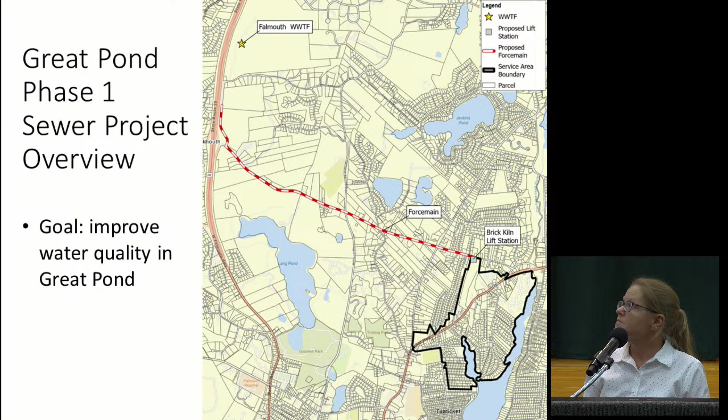The schedule for the project: we'll be submitting the loan application to the state. We are on the list for a 0% interest loan from the state for this project, but we have to submit our final application this month, August, and we're going to be bidding the construction contracts this fall. There will be 2 construction contracts. Construction will start near the end of this year and is projected to take 2 years to complete, so it'll be completed by the end of 2027. Sewers will be available for connection at the end of 2027 or the start of 2028. Property owners will have 1 year after notification to connect to the sewer.

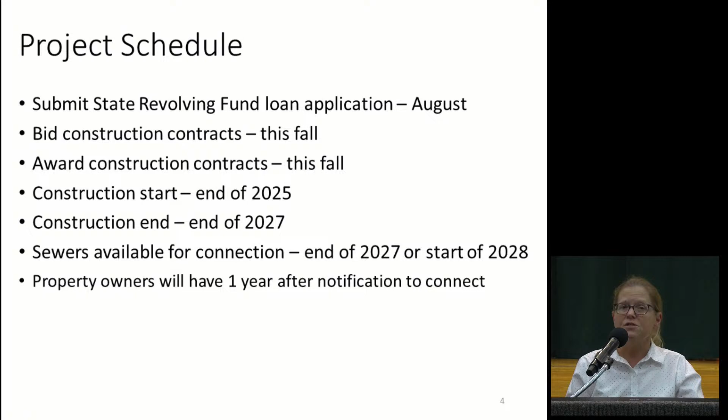You'll get a notification when the project is complete, either end of 2027 or beginning of 2028, and it'll tell you that you have a year to connect to the sewer. The sewer service area is approximately 600 properties on the northeast end of Maravista and on the Teaticket Path Peninsula. It's mostly single-family homes or condominiums, with a few commercial and multi-family properties in this area.

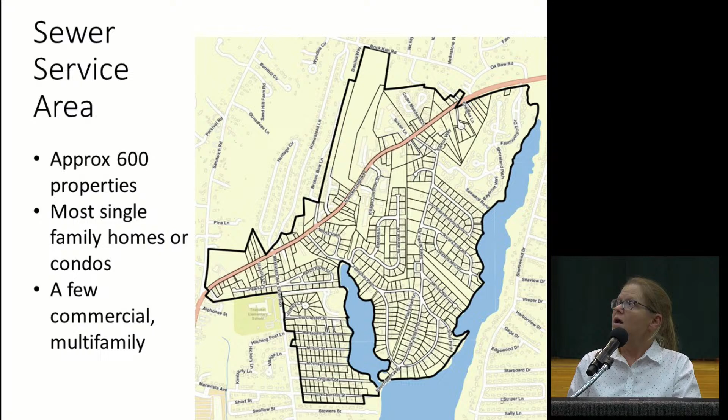For the sewer connection types, there will be a pipe in the street in every one of these roads, and some of those pipes will be gravity pipes. In this figure, the green areas, which are only on Maravista in this project, will be served by gravity sewers, so those properties will connect to sewer by gravity.

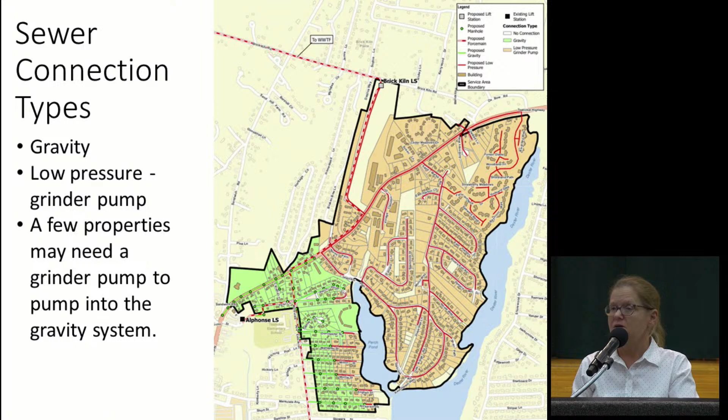The properties shaded tan or brown, which is all of Teaticket Path Peninsula, as well as the lower portions at the end of the roads that dip down a little lower, will be served by grinder pumps. There are a few properties that may have a gravity pipe in front of the home, but because the property drops off and the home is lower, they may need to pump into the gravity system. We'll figure that out as we get closer, but this is a pretty good idea of what the gravity and low pressure distribution will be in the sewer area.

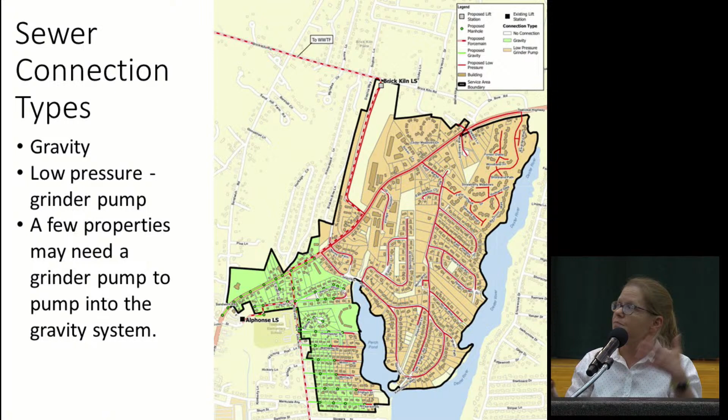It's a 2-year construction time frame. The town's contractor will put sewer mains, which are the larger pipes, in the roads and the manholes, and then lateral pipes from that main in the road out to the property line for each property in the sewer area. A lateral is just the pipe from the sewer main in the road to each property owner's property line.

There will be several passes of construction on each road because the contractor will come in and put in the sewer main, then come back with another crew who puts in the laterals from that main to the property line, then come back and do temporary paving, and then come back and do the final permanent road paving. So that's 4 times construction will go by each property, but it's a linear project, so they keep moving in each time they come by.

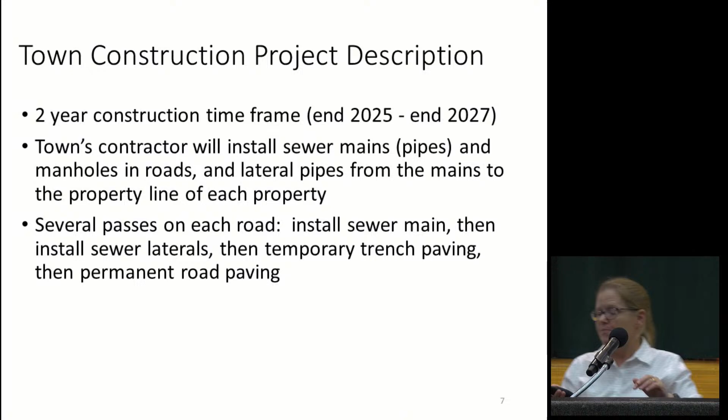As part of this project, we have in the project bid documents full width mill and overlay paving for all the roads that are currently paved in the sewer service area. Unpaved roads will be restored as they currently are surfaced. Most of the roads in this sewer service area are private roads. The town is not taking over ownership of roads as part of this project, and we're not taking over maintenance of the roads. We are paving them because we are disrupting them, but they're not becoming town roads through this process. There is also no stormwater improvement associated with this project - I'm sorry to say that - because stormwater improvement on private roads would increase the cost of the project dramatically, and it's not in the project.

There will be multiple crews working simultaneously in the sewer area, and we won't know ahead of time exactly how the contractor chooses to move through the area. But we will provide information updates on a very regular basis about where the contractor is expected to be in the coming weeks. There are preliminary traffic detours included in the contract, and the contractor will be allowed to work year-round. This is a summer community, and it's not ideal to have construction in the streets in the summer. However, it gets the project done a lot faster, saves money, and moves through each area consistently. So there is no summer exclusion in the project except on Route 28.

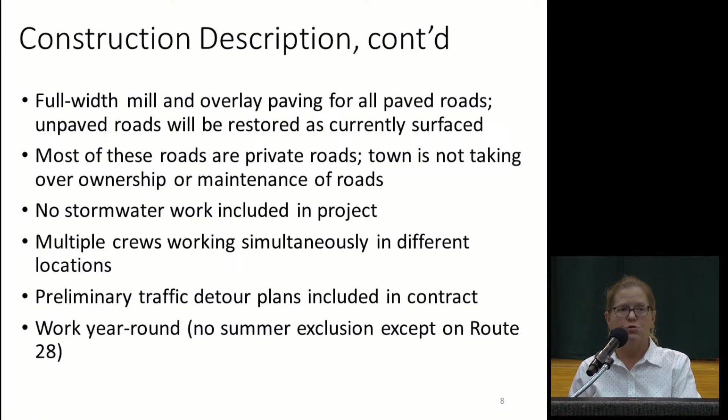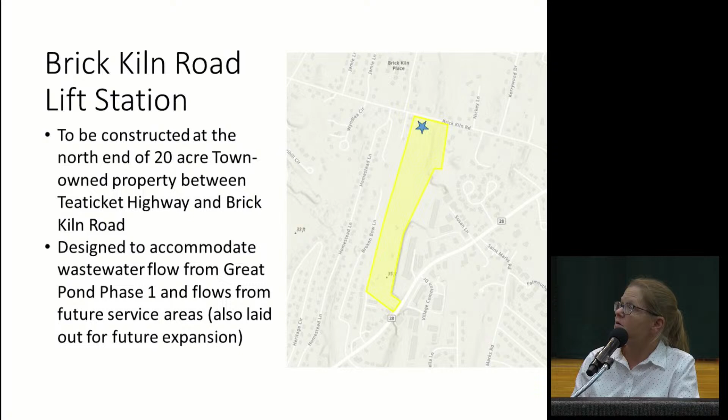The Brick Kiln Road lift station will be constructed at the north end of the 20-acre town-owned parcel between Teaticket Highway and Brick Kiln Road. It's designed to accommodate wastewater flow from this sewer area, as well as from planned sewer areas further to the east and in Falmouth, and it's laid out to allow future expansion beyond that if needed. Construction of the lift station will also take about 2 years, and the Brick Kiln Road site will likely be used as a staging area for the contractors, as it was used previously in a water project.

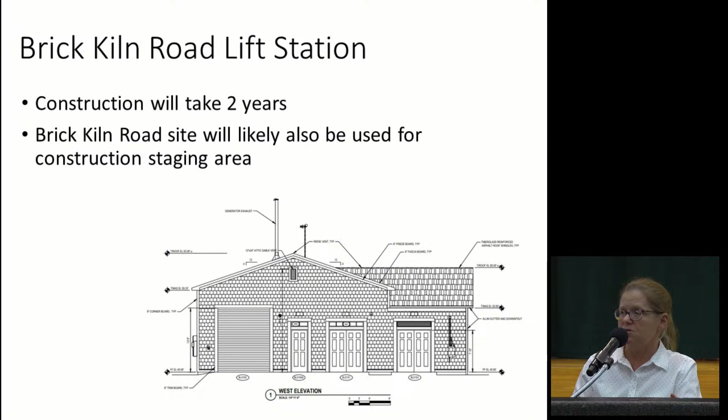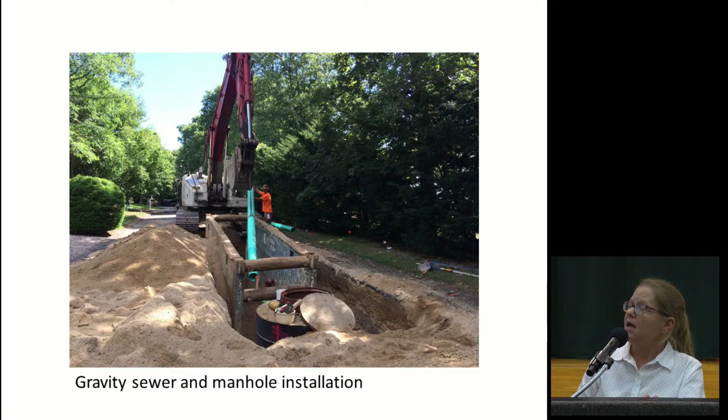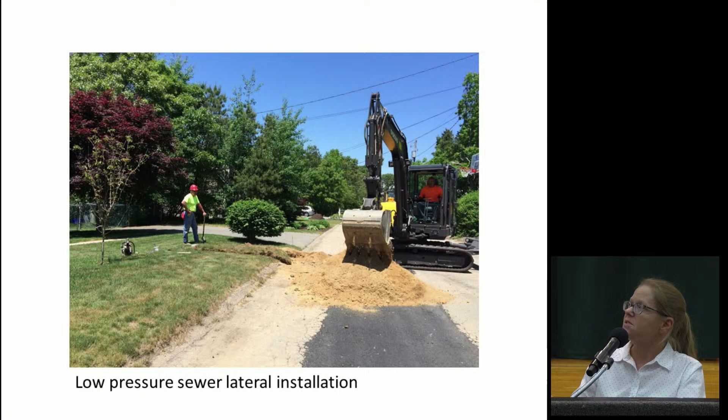And this is installation of a low-pressure sewer lateral. You can see there's a pipe already in the street, and because this is low pressure, that's a relatively small trench, and this crew is installing a lateral to the property line.

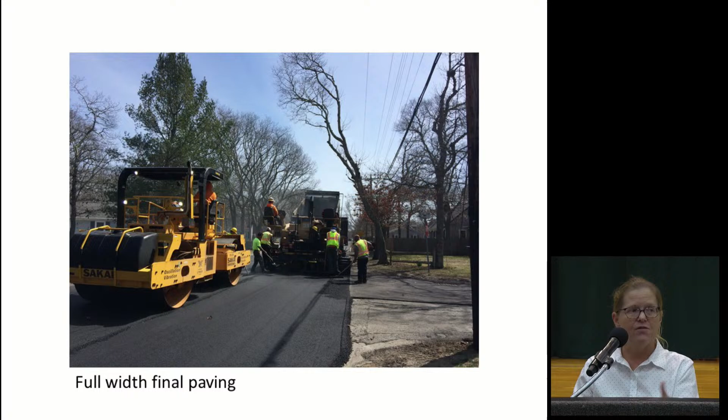So whatever the existing width of the pavement is, we're repaving that. We're replacing the existing footprint of the paving.

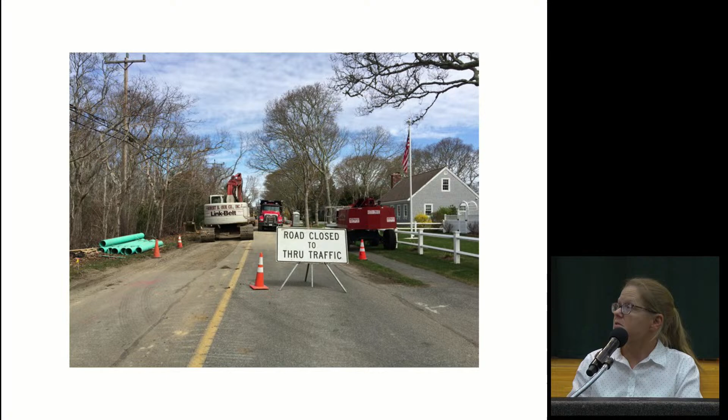Again, there will be some detours and some traffic impacts. One of the early things that will happen in the project is that you'll have the opportunity to tell the contractor and the town where you would like the sewer lateral to be installed.

The sewer lateral placement would depend on where the existing septic line leaves the house and some other factors I don't need to get into right now. So you could consider discussing this if you have a plumber, installer, or engineer you work with. Or if this is something you already know, you can start looking into this.

We do in the design have a lateral location planned for each property at this point, based on the available information we have. The engineer looked at the septic records, and where we have septic records, we are locating the laterals based on where the building is on the property and where the septic system is shown.

But what will happen at the beginning of the project is the contractor will put out a stake, a green stake, and then we'll provide you a sign. So you will be able to tell us, no, we don't want it there, we want it here. And we can change that before the lateral's installed.

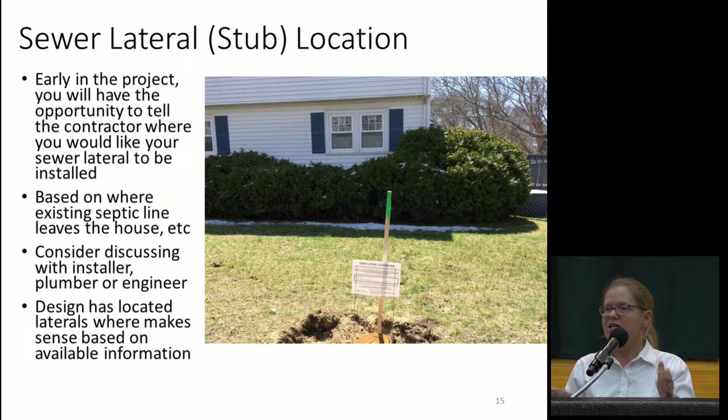The sewer connection process: sewer connections will not begin until the end of 2027 or the beginning of 2028. So it's more than 2 years from now.

I don't want people to leave this meeting in a panic that they have to connect, that the project's beginning and you have to connect to the sewer. You can't connect to the sewer for more than 2 years. So there is time to figure things out and plan ahead for it.

The first step will be to contact installers, plumbers, or engineers, review sewer connection options and layout, and obtain quotes for the work. Again, it doesn't need to happen now, but when we send out mailings ahead of time telling you to prepare, then you would start this process.

For the Little Pond project, we required that connections be overseen by a plumber licensed in Massachusetts. I am considering certifying drain layers instead. The town doesn't have that right now, but if we were to do that, it would require a town bylaw change. So to be honest, I'm not certain right now whether a plumber will be required to be involved for all of the work.

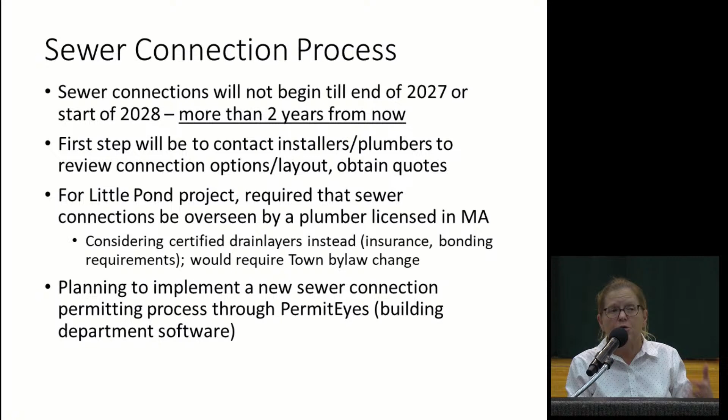We are also planning to implement a new sewer connection process. For the Little Pond project, there was this whole separate sewer connection process that is now obsolete. The town building department has a building permit system called PermitEyes, and we will be setting up a module in that for sewer connections, so contractors will apply through the building department's permit system to connect to the sewer.

The property owner, and the property owner's contractor, will also be responsible for abandoning the septic system. Abandoning your septic system is the jurisdiction of the Board of Health, but what they have required in the past is that you pump the sludge out of your septic system, and then your contractor has to punch a hole in the bottom of it and then backfill it with sand.

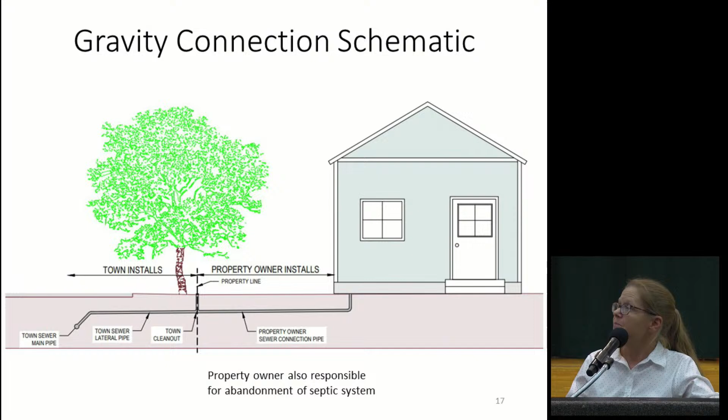They can remove it if you want, but that's likely more expensive. So what most people do is punch a hole in it and fill it with sand or clean fill. This is a schematic of a low pressure or grinder pump connection schematic.

Again, the town will install the pipe in the road, which is a smaller diameter pipe for low pressure, and will install a lateral to the property line. And at the property line, it'll look a little different. It sort of looks like a water valve, which you all have on your property. So we'll install a valve at the property line.

And then the property owner's contractor is going to be responsible for installing the connection between the home or the business, in the case of a business, and that lateral at the property line. In the case of a grinder pump connection, there is a grinder pump involved, and I'll be talking more about that, and a control panel, electrical for that.

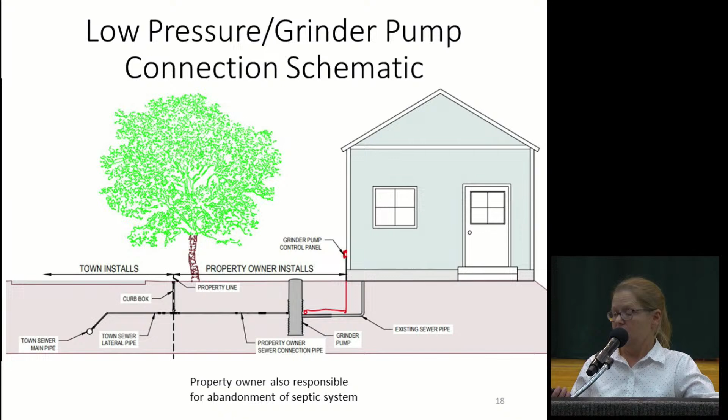This is a little bit of a cartoon of a grinder pump connection. Again, here's the pipe in the street, and here's the sewer lateral to the property line, and the valve at the property line. The property owner's contractor will take gravity pipe from the house into the pump, and wire up the pump to a control panel, and then they'll install this pump, and the pump will have a smaller diameter pipe which will pump into the town's sewer system.

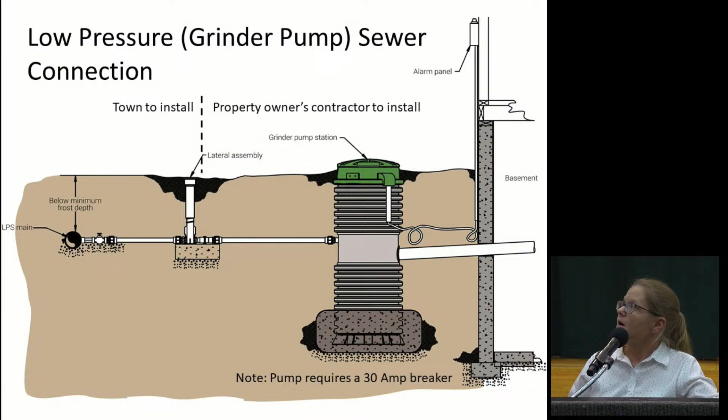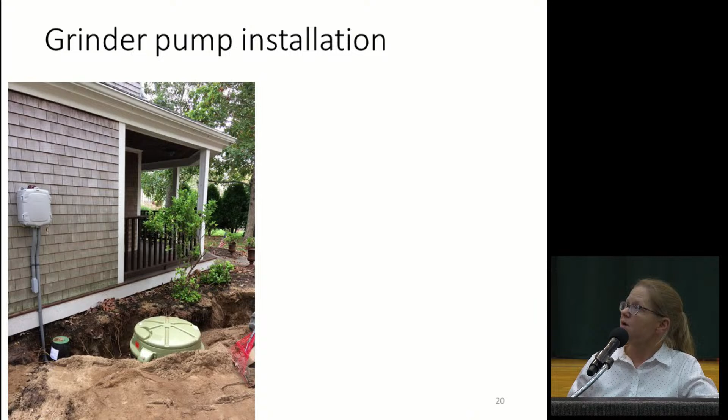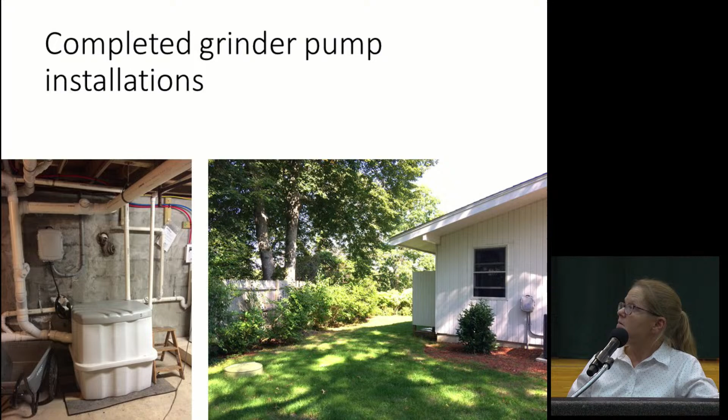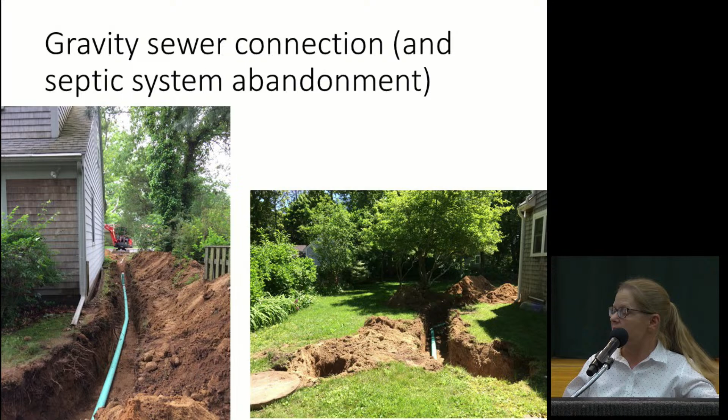So I wanted to talk a bit about grinder pump policy. Grinder pump policy has not yet been set for this project, so I can't tell you for certain what the grinder pump policy will be. I can tell you what the grinder pump policy was for the last project.

The last project, the Little Pond project, we installed 681 grinder pumps. The select board voted to provide those pumps for single-family residential properties, not for commercial and multifamily properties.

The town also agreed to provide maintenance of those pumps, reserving the right to charge the property owner if the pump was misused, if people are throwing things down the drain that really don't belong there and it's causing a problem. We reserve the right to charge property owners, but overall, the town is performing maintenance on those pumps.

The town also agreed to provide emergency pump out service as feasible during power outages greater than 24 hours. Many people choose to put in a generator for their property, but if they don't have that, this is something the town did for the last project. The town also voted to provide pump replacement at the end of the pump's useful life.

Finally, the town also provided a subsidy, which was a flat amount. It didn't reflect the actual cost on any one property. It was a flat subsidy to partially compensate property owners with grinder pumps for the additional cost of pump installation. The idea was that it's more complicated and therefore more expensive to install a grinder pump, and in many cases, but not all, it is more expensive. So the town did vote to provide a partial subsidy.

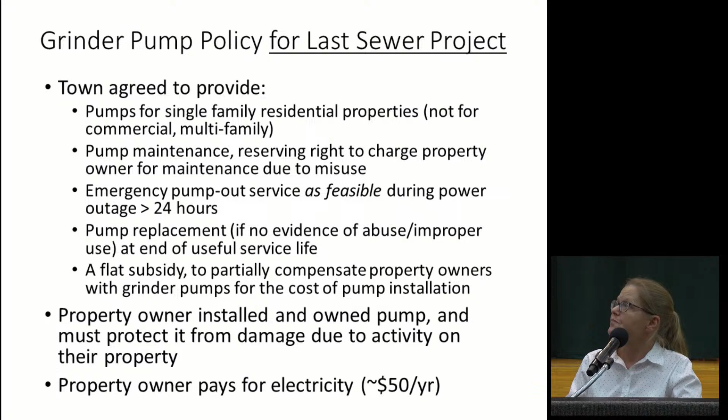These pumps don't run all the time, they just run when the level gets higher in the pump chamber. However, all those things I just said require spending town funds on private property, and that requires special legislation. Special legislation was passed to allow this for the Little Pond project. There will be an article at this November's town meeting to petition the legislature to allow for Great Pond Phase 1, and potentially future projects, for the town to do this kind of thing they did for the Little Pond project.

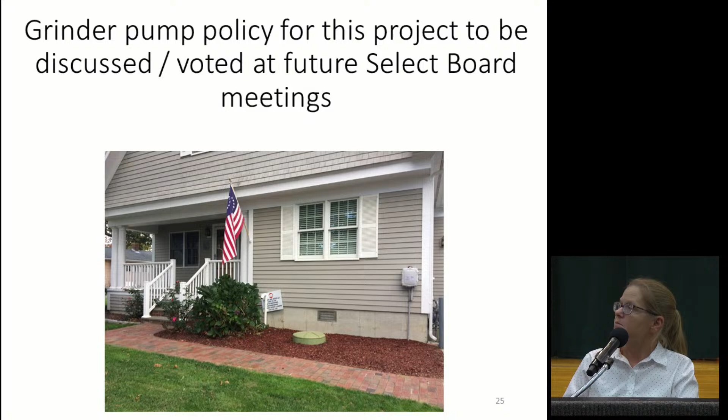So a grinder pump policy for this project has not been voted and will be discussed and voted at a future select board meeting. This is another photo of a grinder pump installation. Here's the pump, here's the control panel.

Grinder pump care - we're almost done on grinder pumps, bear with me. A grinder pump can handle all typical household wastewater. However, don't flush these things down the drain: wipes, oil and grease, rags, diapers, tampons, plastic, dental floss, stones, shells, etc. Note, however, these things shouldn't go into the gravity system either. People do put these things in the system, and it can cause problems on their own property, or it can cause problems in our collection system, which then can back up into private property. So we strongly recommend that all that goes into the sewer is sanitary waste and kitchen waste.

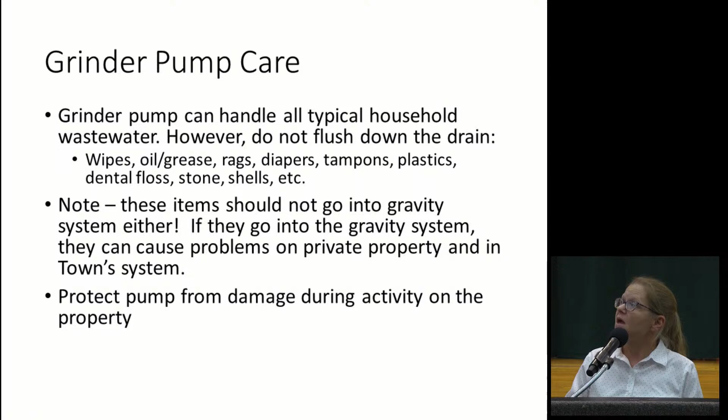Again, you have to protect the pump from damage during activity on the property. During a power outage, unless you have a backup generator, if you're on a grinder pump sewer system, you need to limit water use. Water use is limited just by the power outage itself - a lot of appliances like washers require power, but for water uses you can still do when the power is out, you'll need to be aware of the limited capacity.

The last thing I'll mention is that before you leave for an extended period, if you have a grinder pump, it's a good idea to run about a half bathtub of water down the drain. A lot of people are seasonal, so if you're not going to be using the house for a while, I'd recommend putting some clean water down the drain so that when you come back, your pump has clean water in it.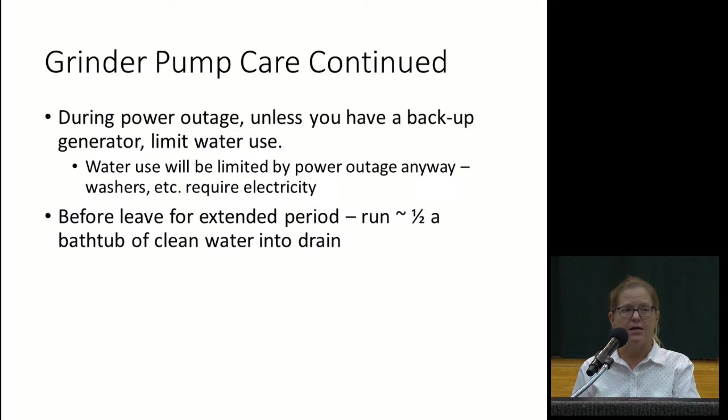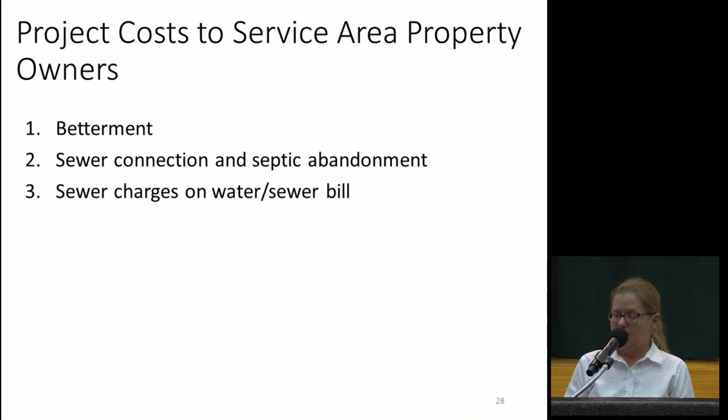On the betterment, the select board voted a sewer betterment policy earlier this week on Monday. I'll talk more about that next.

The next two steps in the betterment policy are after bids are open, so late fall of this year, the select board will vote an order of betterment assessment. That'll include a list of all the properties in town and how many sewer equivalent units they'll be assessed, which we'll talk more about later, and then the betterment assessment per property.

After the project is complete, in the fall of 2027, the select board will vote to certify the total project cost and certify the betterment amount. That amount can be lower than the amount voted in the order, but it cannot be higher.

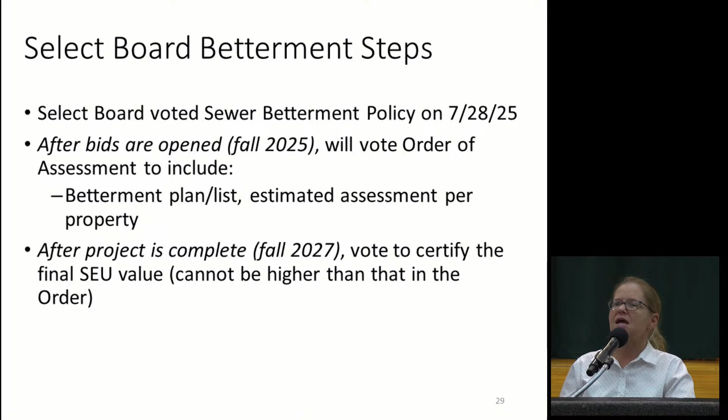So you'll know what the maximum betterment cost will be at the time they vote it in late this year. I misspoke earlier, I said the betterment plan and list would have the number of SEUs. It won't. It will have the property list and the betterment assessment amount for each property.

This is a summary of the select board's policy adopted this week. Here are the costs applicable to the sewer service area: the collection system, meaning the sewer mains in the street, the laterals to the property line, and the grinder pumps if purchased by the town, and 60% of the construction engineering cost, since some engineering is associated with other parts of the project not covered under the betterment, like the design or construction engineering for the lift station and force mains to the plant.

70% of that project cost applicable to the service area, so 70% of the cost of the items just listed, will be paid by service area property owners via betterments. All remaining costs, the brick kiln lift station, the force mains up to the plant, police details, fiscal and legal costs, will be borne entirely by the town.

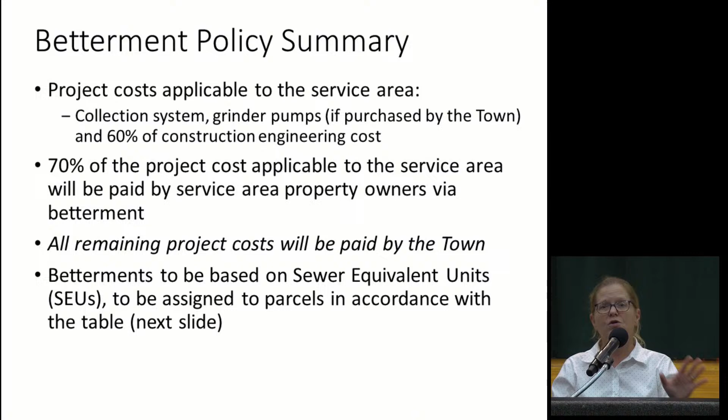Betterments will be assessed based on sewer equivalent units, or SEUs, assigned to parcels in accordance with the table. Again, I'm summarizing the policy the select board voted. They didn't vote a betterment amount yet, just a policy that allows us to determine the betterment amount. This is the sewer equivalent unit assignment.

I won't go into a lot of detail on this. Single-family residential units or single residential condominium units will all be assessed one sewer equivalent unit, as will multifamily up to 4 bedrooms. Multifamily including 5 bedrooms or more, and apartment buildings, as well as motels, will be charged a quarter of a sewer equivalent unit per bedroom, based on the assessor's records.

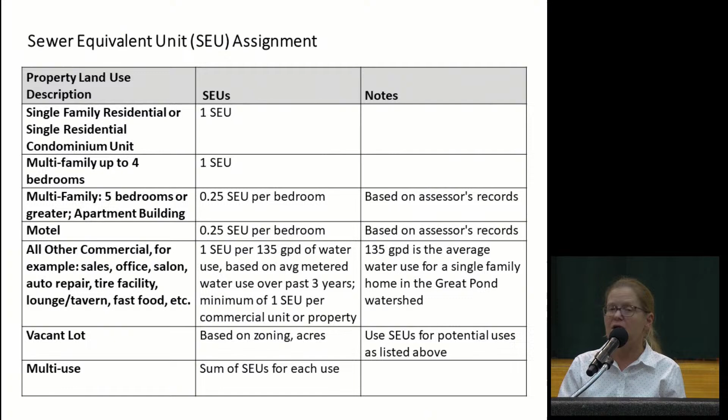All other commercial, and there are a few commercial enterprises in this area, will be charged 1 SEU per 135 gallons per day of water use, based on their metered water use over the last 3 years. Vacant lots will be assessed based on zoning and acreage, and multi-use would be the sum of the sewer equivalent units from the other uses.

So the select board didn't vote a betterment amount, but based on the policy and our current estimates, we can estimate what that betterment would be. Based on all of that, the total cost that will be paid via the betterment is approximately $20 million, a little more than $20 million.

The estimated number of sewer equivalent units in this sewer area is currently 830. If you divide the 20 million by 830, you get a little more than, or exactly, $24,576 per sewer equivalent unit.

You can pay the betterment up front if you want, but you can also pay it off over 30 years. The town petitioned the state legislature for the last project, and it was adopted into law that the town can charge this betterment over 30 years. So the dollar per SEU per year over 30 years is $819 a year.

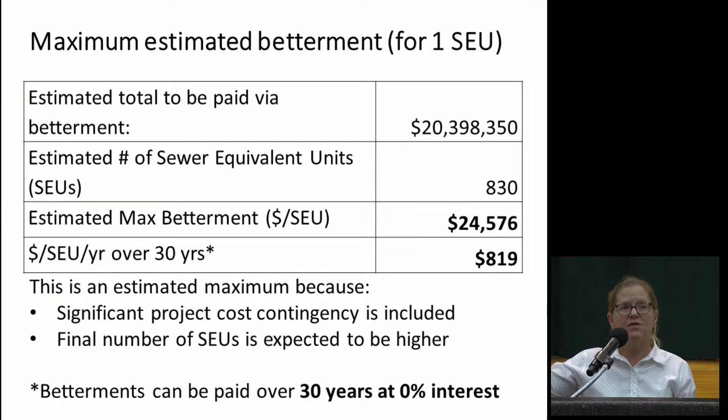So if you're a single family property or a condo, the maximum estimated betterment cost per year is $819 a year. I call it an estimated maximum because there is project cost contingency in the numbers used to derive the 20 million, and because we expect the final number of sewer equivalent units to be higher than 830. The assessor's office is still working with us to finalize the number of sewer equivalent units, so I expect that to go up, and then the final number would go down. I don't know how much, I'm just saying this is a high estimate and I expect it to go down.

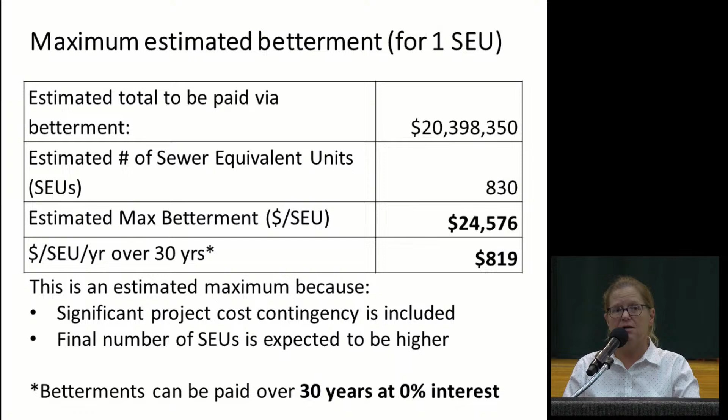And did I say 0% interest? That's a big deal, to be able to pay this off with 0 interest over 30 years. Obviously it's a lot of money, the betterment is a lot of money, but dividing it out over 30 years at no interest is a very large benefit to the town and to the property owner.

The betterment process: the initial betterment payment is expected to be due after the project construction is completed. So they'll have the hearing initially and set that betterment amount, but you won't start getting charged for the betterment until we know the total final project cost and the project is completed.

Betterments are added to your real estate property tax bill, and they can be paid in full or a portion in installments over 30 years. They're billed on the 3rd and 4th quarter bills - that's just the way the assessor or the collector's office does it.

Betterments are assumable at sale if the lender approves. Basically, how a betterment works at the time of sale depends on the lenders, on the banks involved. Different banks have different rules about whether a betterment has to be paid off at the time of sale or not, so I can't say for certain what the status would be for your particular property at your particular sale.

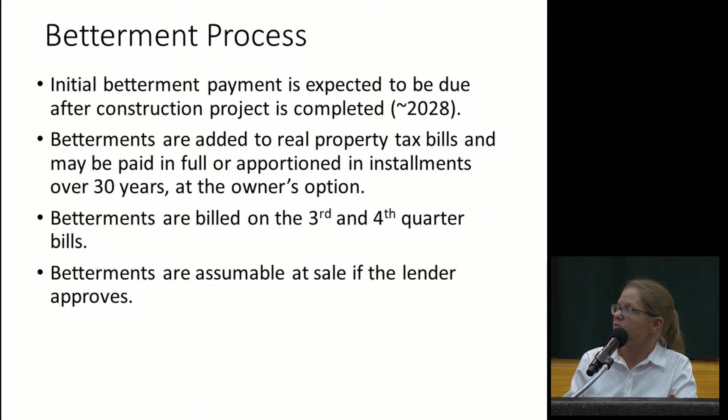There are two things, an exemption and a deferral, that are applicable to people who meet very specific criteria. Under Massachusetts law, people over 65 whose principal residence is in Falmouth may qualify for an annual real estate tax exemption. There are income and asset criteria, so I don't want to mislead people that these are going to be available to everybody, but there are people who will meet these criteria and this may be available to them.

It's also possible to defer betterment payments. Again, under Massachusetts law, homeowners 65 or older whose principal residence is in Falmouth and with less than $40,000 in annual income may be able to defer the betterment until house sale or estate settlement. There is an interest applied for this, and I don't have the number right now. This is an assessor question.

It also requires an annual application to have that deferred. And the assessor points out it would need to be approved by town meeting, so we would need a town meeting article to allow that.

So I'm done on betterments. Now I'm moving on to the next cost. We talked about betterment cost - now I'm talking about sewer connection cost and the cost of abandoning the septic system.

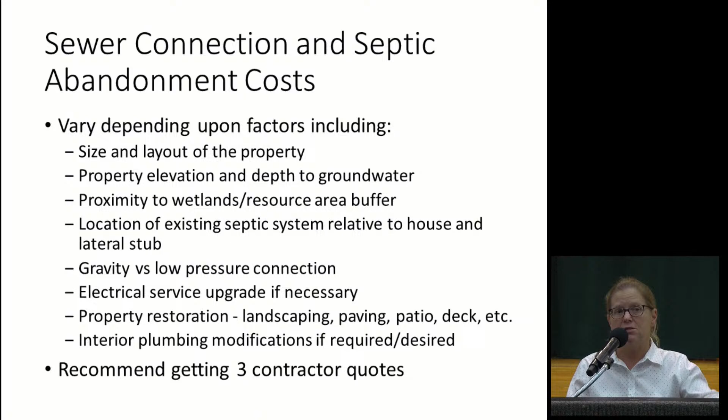So people want to know, what is it actually going to cost? Let's talk about averages. Some people in the Little Pond sewer service area paid as little as $1,600 if they had a very short connection—house right on the street with no restoration. The lowest number I saw was about $1,600 for a connection, and the highest was more than $20,000.

But on average, they were not on either side of that. At the end of that project, we ended up with actual installation cost numbers from hundreds of properties, so we could look at the average cost for a gravity connection and the average cost for a grinder pump connection at that time.

The average for a gravity connection was about $5,300, and the average for a grinder pump was about $7,100. Some gravity connections were more expensive than some grinder pump connections, but in general this was how it broke down. So if I were estimating today, I'd take those averages and escalate them 4% a year to 2027, giving about $7,800 for gravity and $10,500 for low pressure. This does not include the cost of the pump itself, which the select board will still need to vote on and discuss, nor does it include an electrical upgrade or any extreme scenarios like we just discussed.

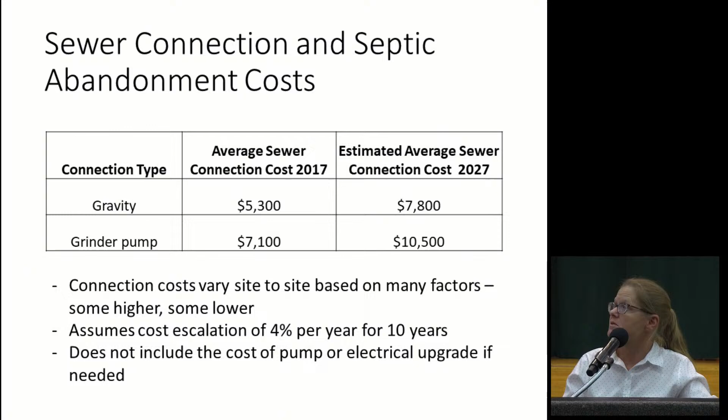The third cost I mentioned is the sewer use cost. Once you connect to the sewer system, you'll be billed for sewer on your water and sewer bill. The bill you get right now is just a water bill; then it'll be a water and sewer bill. Just like with water, sewer billing has an annual fee and then a tiered rate structure depending on how much water is used in the period.

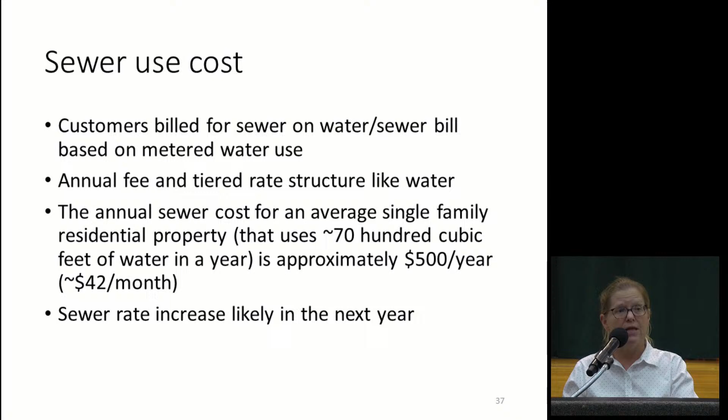The annual cost for an average single-family residential property—one that uses about 70 hundred cubic feet of water in a year—is approximately $500 per year, or $42 a month right now. That's if you're using an average amount of water. The sewer rate will likely go up in the next year, and the select board may vote to have it go up for the next few years. It hasn't been raised in a number of years, so it's due for an increase. But this is what an average bill would be under the current billing. If you use a lot more water, the bill is a lot higher.

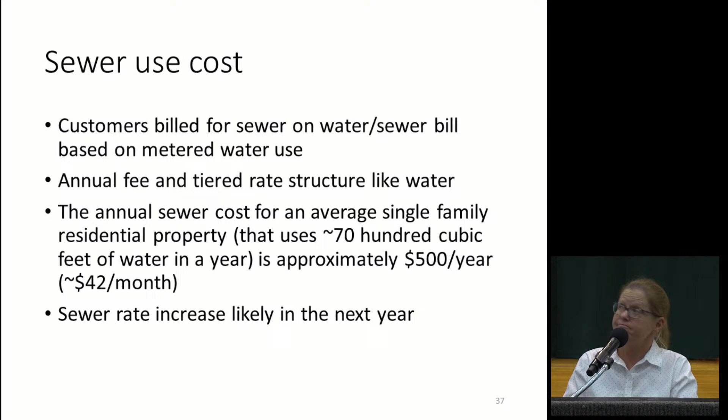So there is some assistance for properties with sewer connection costs. Again, these have criteria. There's the Cape Cod AquiFund, which has interest rate loans varying from 0% to 5%. For the low interest loans, 0 and 2%, applicants must meet a whole bunch of criteria, including that it must be a single family residence, owner-occupied, year-round primary residence.

So don't take my word for the details—you can talk to the AquiFund when things get closer. We'll also have information on the website with links to these things. What I'm talking about today is the bird's eye view summary of each of these; there will be more information later and links to who you can contact directly about it.

There are also Massachusetts residential income tax credits. The credit is 60% of the connection cost, not to exceed $30,000, up to a total of $18,000 over 5 years. This is a big deal—it's been raised significantly since the last project, and it will apply to a lot of property owners. Not all of them; qualifying criteria include that it must be an owner-occupied principal residence. But there are fewer criteria for this than for others, so it can really help a number of people out on reducing their taxes.

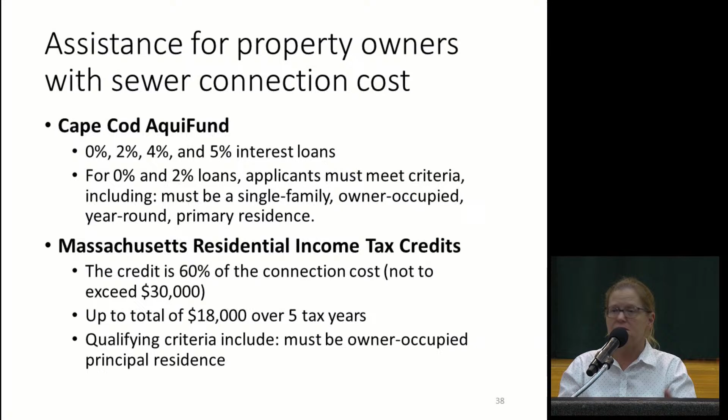Future communication. So I've said an enormous amount tonight. I'm sorry, thank you for sticking with me.

For updates via email or text, as I'd said in a previous mailing that you hopefully all got, you can sign up on the town's website for the Notify Me app. If you can't figure out how to do that and you want to just give us your contact information, we can do that. That same form I showed you at the beginning would be a good way to do that. Write down your name and your contact information and just say at the bottom, please add me to Notify, or I want to get notifications. We'll add you to the list, and during construction we'll provide weekly updates, brief updates, just a bulleted list of where we expect the contractor to be working and what we expect the detours to be, and those same updates will also be on the website. You can get this information via either email or text, or both if you want.

There will be future meetings. This is not the last meeting on this project. There will be additional meetings, for example, about the sewer connection process and the permitting process. As you could hear earlier, it's not all worked out yet, so I can't answer all questions about how the sewer connection process or permitting will work at this time. But as we develop that, we will have future meetings about it as the time gets closer. We will also talk more about cost - there's the betterment hearing and future discussion about cost, and also future meetings about grinder pumps specifically. On the last project, we provided training with the manufacturer's representative on grinder pump installation, and we expect to be doing something like that in the future.

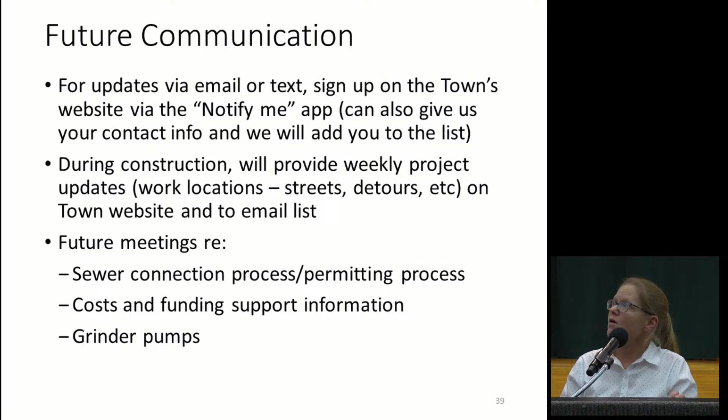And that's it. As I said before, I wanted to start with questions that are relevant potentially for a larger portion of the group. Unfortunately, because this is being recorded, I'd like to ask people to come to the microphone to ask their questions. I know that's a bit of a hike for some of you, and you don't need to form a line, but people who want to ask questions relevant to other people, please come to the microphone. And if you can, say your name and ask your question. Thank you.

My name is Heath Coker, and I'm a realtor, and I have 5 brief questions.